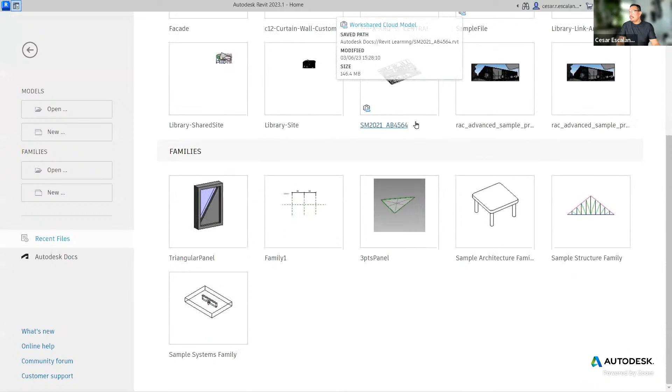Last time we talked about BIM Collaborate Pro. I entitled you with a seat to have access to our project. To recap the last class, BIM Collaborate Pro is a set of tools that allow us to share our models on the cloud, and centralize and distribute information about the projects in a common data environment that can be accessed with different levels of permissions by members from different teams. And in order to be part of BIM Collaborate Pro, you need to secure a seat of a license, and you need to be invited to a tenant site. A tenant site is a project site.

I discussed a lot how Docs works, and last time I showed you ways in which you can use Docs to send information, review information, markups. I did a lot of review of the features in Docs, but I want to focus now on the method of starting a collaboration in the cloud from Revit.

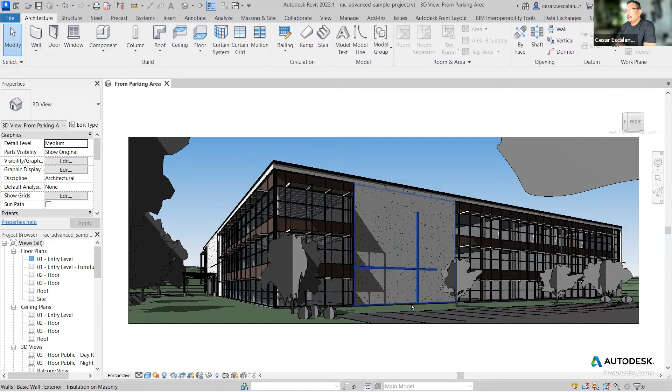All right, so assuming that this is a project that's living on your network, and then you're asked to start collaborating on the cloud, what that means is that this model needs to be moved from the local server location where it's living now into a cloud repository. This project has several sheets, some schedules, but now it has reached a point where I need shared collaboration by an entire team. Typically, in the context of a single-location office, you would save this as a central file and place the central file on the server, and then everybody connects to the server, right?

In the context of a cloud collaboration, you can have multiple team members sitting geographically dispersed in different locations around the world. And as long as they have access to a Revit license and they are entitled within Collaborate Pro, they can collaborate jointly in a single model in a single project.

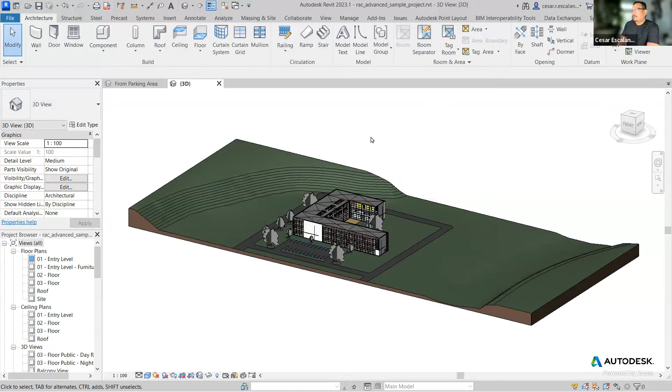So I'm going to show you how to create a new central file in the cloud. So you go to the Collaborate tab, and then you hit the Collaborate button. You must save the file, and I'm going to save it in a different location, so I don't want to override the version I have here. So I'm going to save it in my desktop for now.

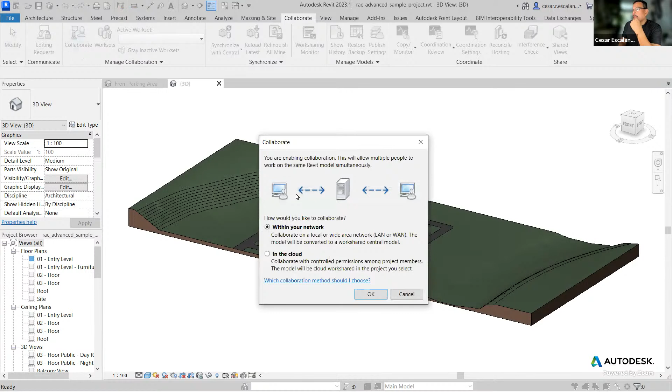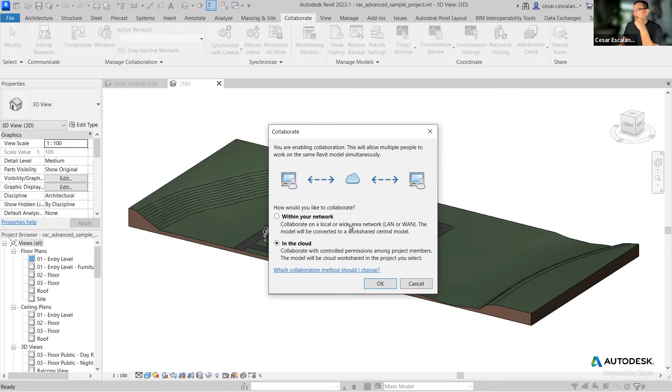So you hit Collaborate, and Revit presents you with two choices: collaborate in your server or collaborate in the cloud. I'm going to say collaborate in the cloud. Now, for this to work, the person who's doing this most likely needs to be a project administrator of the tenant site, and needs to have the permission to access the appropriate folder. I am an administrator, so I'll be able to do that.

And then there's this dialog box that is called Save as Cloud Model. So here I am presented with all the projects that I'm part of. And I'm going to switch accounts because I think I built this under the TMMArch. And the project was Revit Learning. This is the project everybody has access to. And under the models, architecture, this is the location I'm going to create this file, rac advanced sample project.

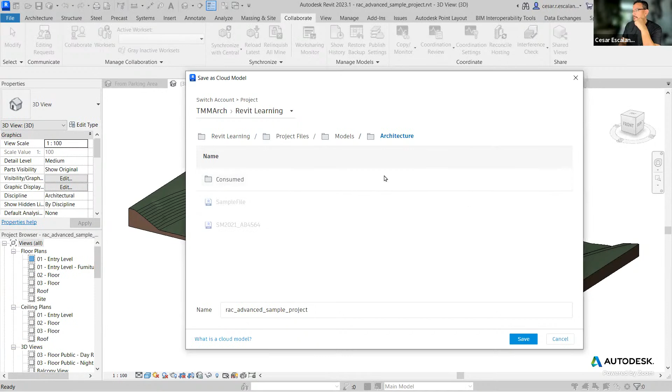Usually, the folder structure is set up so that you don't see the work in progress of your consultants. So architects are restricted to access the architectural folders and structural to their structural folder, etc. I'm going to save this into the cloud, which starts the worksharing process. In this process, two worksets are created by default: Workset1, and then Shared Levels and Grids.

Every level and grid in the project is going to be placed in this bucket of information called Shared Levels and Grids. And then the rest of the geometry is going to be placed in this generic workset called Workset1. And you know the concept of a workset. A lot of you have already experienced it, but just to recap, a workset is a method by which we split the model, segregate the model in large pieces of geometry content so that we can selectively turn on and off areas of the model that are not part of our scope of work and improve the performance of the model.

Worksets are not intended to be used as layers; Revit already has categories for that. But the main purpose of worksets is to split the model in buckets of information that can be selectively disabled to improve the performance of the project. That's the whole purpose. If the project is small and the team is small, sometimes it doesn't make sense to split a project in multiple worksets. If the project is complex and it has a lot of links and a lot of different consultants, then it's probably good to think about how to better split a project.

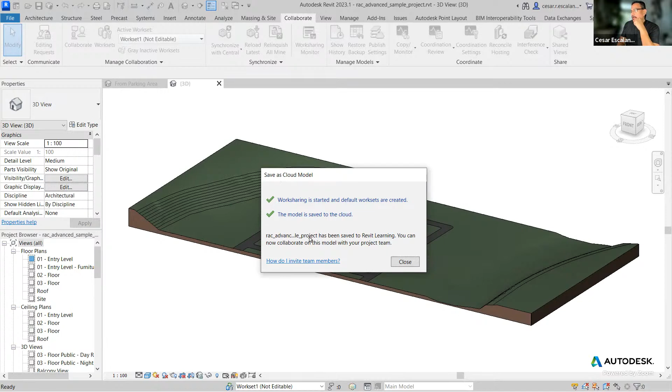An example is you can have a project split by levels if it's a multi-story, or you may want to split it by scope of work, like shell and core is one workset, interiors is another workset, site is another workset, and definitely for every link file you should have a dedicated workset. Okay, so the project has been saved. Then I close it.

Let's review the worksets. When you open the Worksets dialog box, these are the full worksets. And it has this tabular display of information. I think the first column on the right side enables the visibility of that workset in all the views. The column that says yes, yes, means that it's open, it's loaded in the project.

And then you have ones called borrowers and owners. A borrower is a person who has checked out and is working on an active element. And then an owner has complete control over worksets. All of these we reviewed in the fundamentals, and I think a lot of you know this. What you might not know is that there are also all these additional worksets, like families. Each family, all the system families in the project, are their own worksets.

You also have views as a workset. So each view in the project is its own workset. And so sometimes when a person is working in a view, the Revit central file gives you borrowing access to that view. And that's why sometimes when you try to synchronize with central, it says this person has checked out a view. That's because that person is working in the view, and that person needs to sync to central in order for you to sync to central.

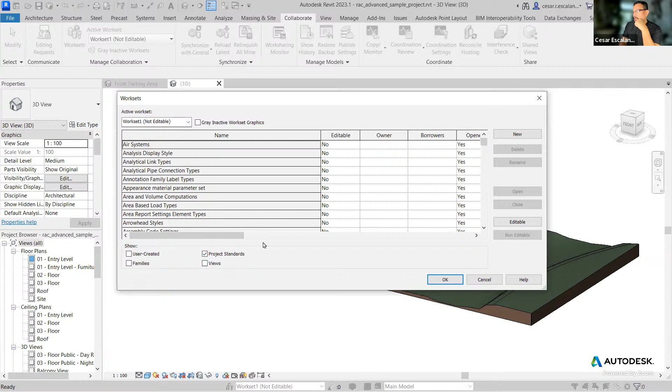And then there's another set of worksets called project standards, which are settings that you can also selectively display or control. All these peripheral or secondary worksets are not highly used. The ones we are most familiar with are the user created.

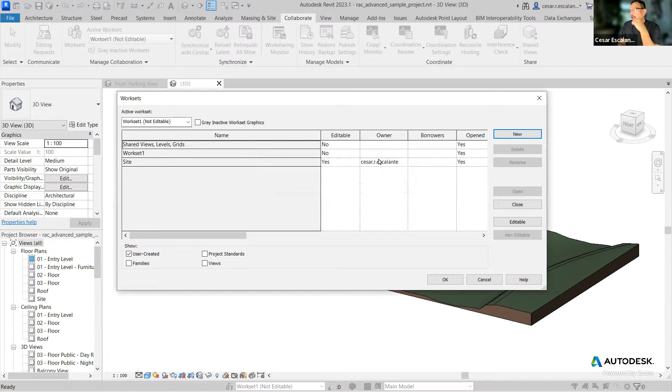All right, just for fun, I'm going to create another workset called site. And notice, because I created this workset, I am the owner of that workset. And when I'm the owner, no one else can work on this workset. Then I hit OK here. They ask you if you want the site to be the active workset. I'm going to say no.

And then every element in the project now has a workset property. So once a project is created as a central file, there's a new parameter associated with every element. Oops. Yeah, so in the instance property, you'll see that there'll be a workset parameter associated with every element. If the project is not workshared, this property is not available. And the other thing you will see is a drop-down list of all the worksets in the project that activates as well. So we need to be aware of what workset we place things on.

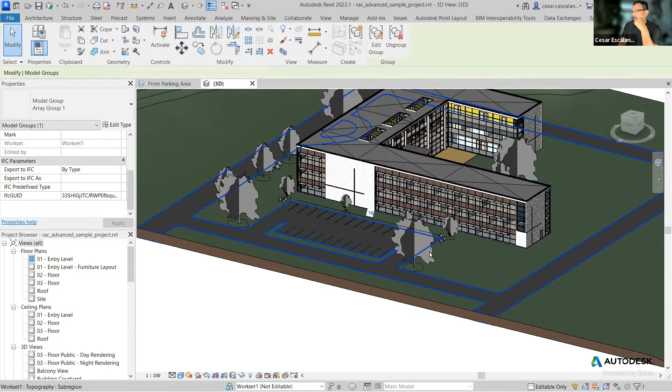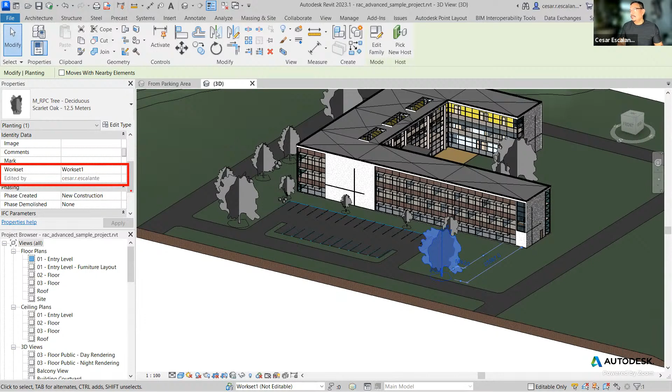And then if I start working on something, for example, I grab this element, this tree, and I move it from one point to another point. When I touch anything in the project, I become a borrower. And a borrower is the person who's editing that object. And so in the workset dialog box, you will see that I am a borrower of workset 1 because I touched that tree that is placed on workset 1, and I am an owner of that element.

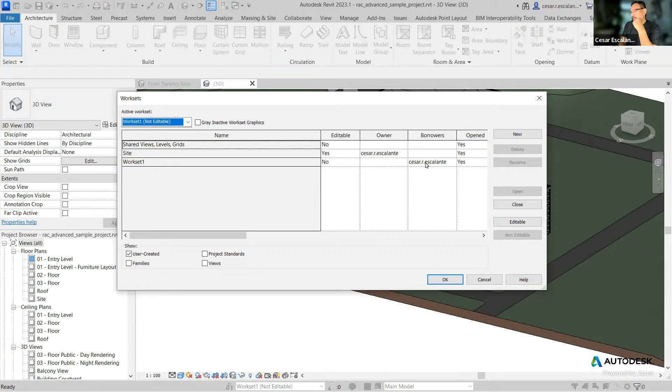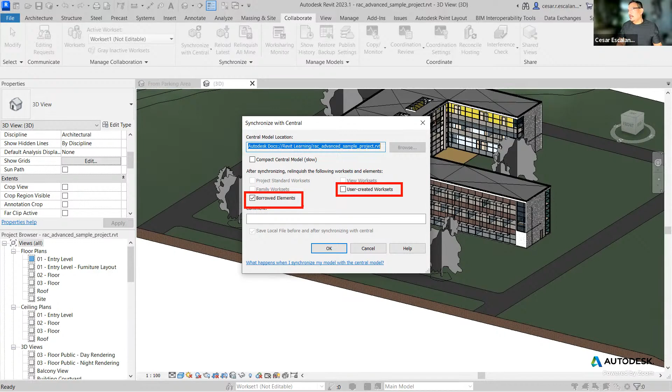If I want to save this file and share it with the rest of the team, I synchronize with Central. And notice that synchronize with Central has this option called relinquish user created worksets, and another one called relinquish borrowed elements. So if my name is associated as a borrower or an owner of any element, I can choose to relinquish or not. By default it's enabled. You can add a comment.

I mean, this is a version with moved tree. And this comment is useful because every time you sync with Central, there is a log of synchronize operations that you can selectively retrieve if anything happens to the project. And this comment is one of the parameters visible when you try to restore an old project.

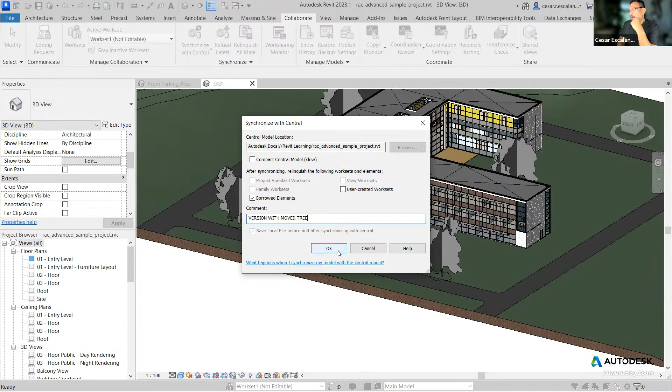So I hit OK here, and when you sync to the cloud, there are 4 things that happen. You save to local, you reload the latest, then you save to central, and then you reload again. Depending on the size of the model, this could take a few minutes for a very large project.

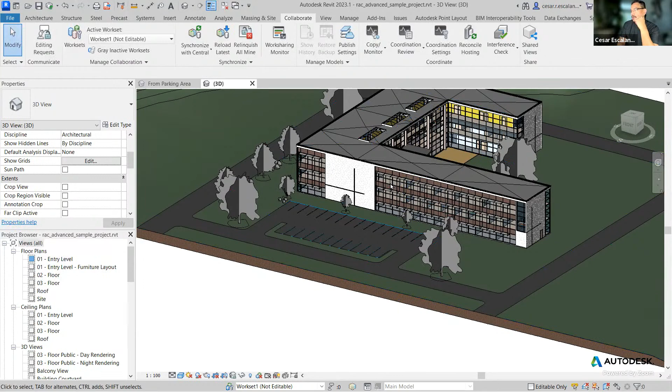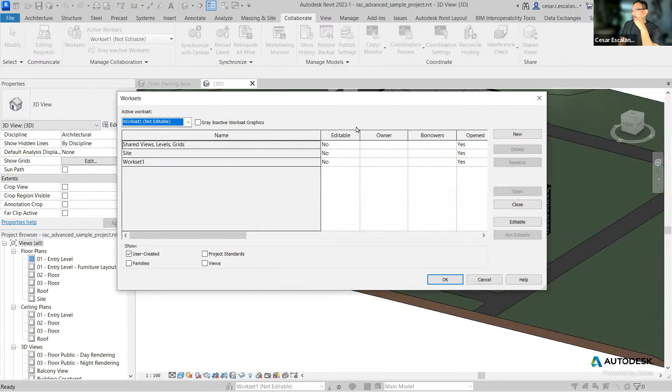All right, and if I go back and review my worksets, notice that I'm no longer a borrower of an object, but I'm still the owner of the site workset. And the only way to return the site to others is to use relinquish all mine. So when I relinquish all mine, my name disappears from the owner column, and this project is open for others to start collaborating.

All right, so let me show you what happens on the cloud side. So I created this file and I shared it on the project. And in Revit, under models, architecture, here's the file. And notice that there's a version. Every file that is synced and created in the cloud will start with version 2.

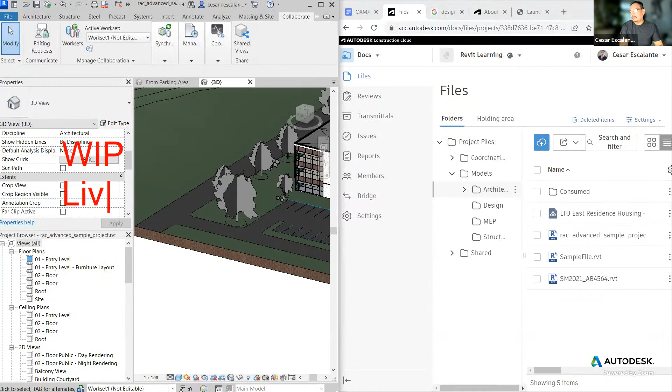And so moving forward, if I make a change to this model and I synchronize with Central, that is going to share your changes to the cloud. But I think I told you that in Revit, there are two buckets of information. The work in progress, which is the live model. And then we have the static bucket, which is what you see in BIM Collaborate Pro, in the docs. And this is a published model.

And so when we create a central file, Revit automatically publishes version 1 and version 2 of the model in the cloud. And then moving forward, if you want to share a static published model in the cloud, you have to choose when to do that. It's a declared activity.

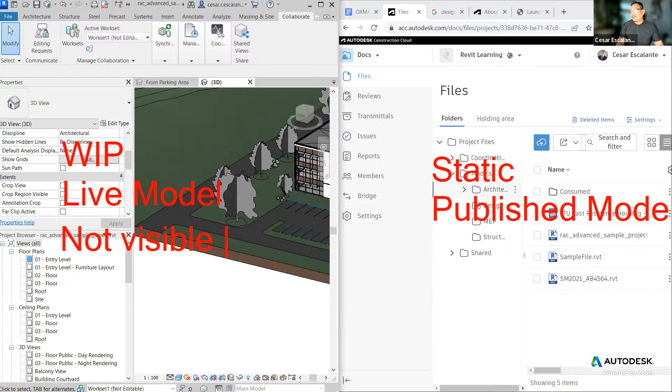So the work in progress live model is not visible to you. This is not visible. And then the static one, it's visible. It's what's in there. Does that make sense? All right. So this is the published file that I generated by creating the central file. And then you get a description of who created it, when it was created.

But there's this misconception that every time you sync to Central, the file that you see in Docs will get a new version, and that's not true. So the act of publishing a file is an operation that requires a user to decide when it is okay to share a file and what content the file needs to have, right? So sharing is not just sending everything to the cloud. You need to make decisions about when and what you're going to share.

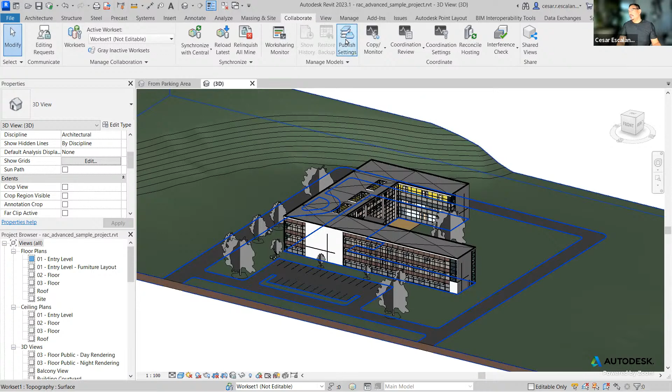And to decide what you're going to share, you actually need to set up publish settings. So under the Collaborate tab, publish settings, this is where you create sets of drawings. A set is a collection of views and sheets that are part of a deliverable. And you can create as many sets as you want with a combination of different views. If a set is enabled in Revit prior to the sharing activity, then only the elements that are part of that set will travel with the file.

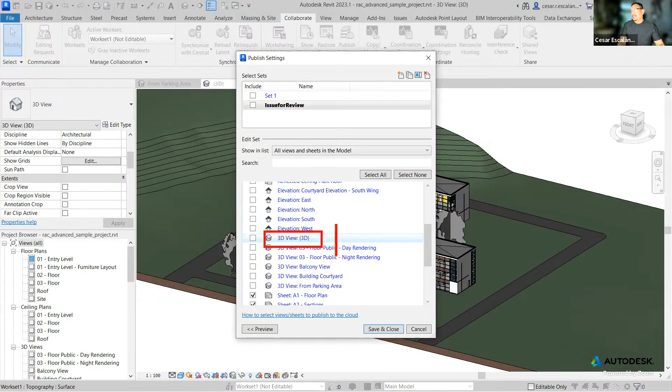So I'm going to create a new set here. And let's say that this is a set that is issued for review. And this set is made of the sheets in the project. So I'm going to select the 2 sheets here. And by default, Revit is always going to include the default {3D} view in brackets. Whether you pick it or not, Revit is always going to pick that default {3D} unless you tell it otherwise.

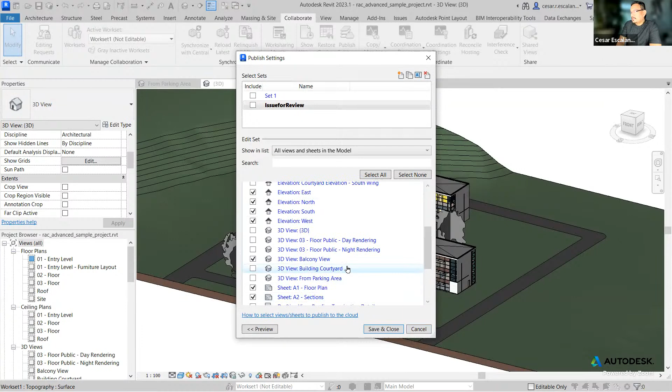So I'm going to pick some of these elevations as part of the set, and I'm also going to pick one 3D view, the balcony view. So in total, when I share this to BIM Collaborate Pro on Docs, I'm going to have a total of 8 views, including the {3D}. So I'm going to save this. Okay, I need to enable this and then save it. So all these checkboxes will be part of the issue for review.

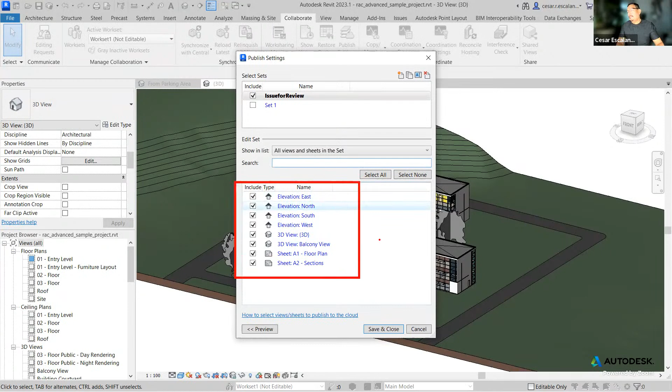And then I am deciding here what to share with the consultants. And every time you publish, you have to make that conscious decision. What is it that I need to share on the cloud? You don't need to share everything about the model. You can be selective about what things are important for your consultants to see. And this subset of information in Revit is called a package. So a package is a collection of views and sheets that are prepared by a consultant and that are suitable for consumption by other users.

And so you create your set, and that's it. I'm going to again synchronize with Central so that set is remembered and shared to other users. But I haven't published this file yet. So let me show you how publish works. To publish a model, you have to go back into the Revit welcome screen. So from the welcome screen, you navigate to where the model is.

This is the model. And notice that the model reports that there is an update available. It means that from the last time the model was published, which was here at 5:49 p.m., there are new changes created by this person, and the user has the ability to publish this as a new version. And so what the user does is select the file and publish.

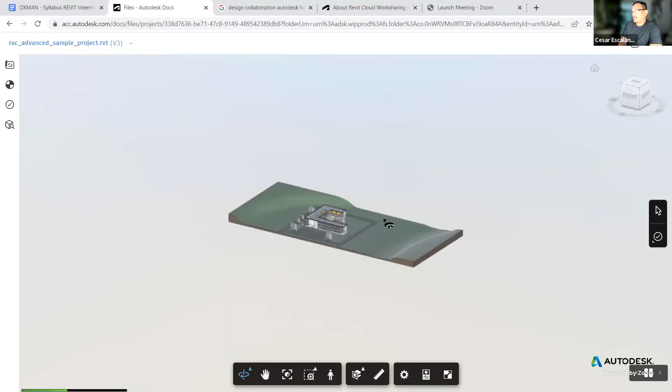This little circle is it compressing the geometry of the view so that it can be quickly, easily navigable in the viewer. Now it's finished. When it's finished, it's actually viewable. And this is version 3, and this displays the model with the tree that I moved, and with the worksets that I published. And so you have to make changes in the model, and you have to manually publish it with a subset of sheets in order to see a new version.

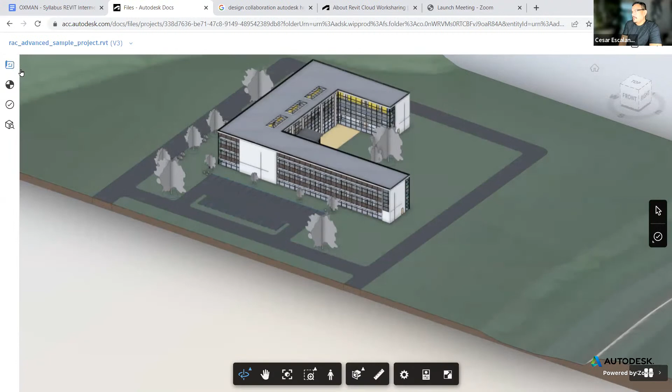Now, in the viewer, you have access to the sheets and views. So here where it says sheets and views, this is the default 3D that I picked from Revit. And in the 2D are the 2 sheets, the elevations. And so the sheets and views tab is a reflection of the information that you placed in the publish settings. So all the information that you see here is the information that you see in the cloud, right here, and is associated with a version in the project.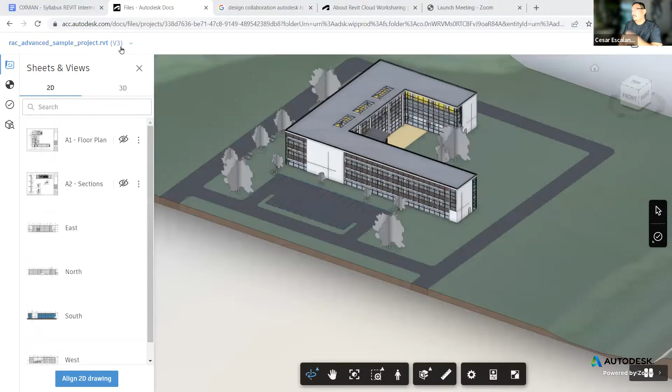Now I can also access those sheets directly from the visualizer. I can use the markup tools that I showed you how to use. You can even print directly from the cloud if needed, or you can share with other stakeholders that are part of the team, or download it.

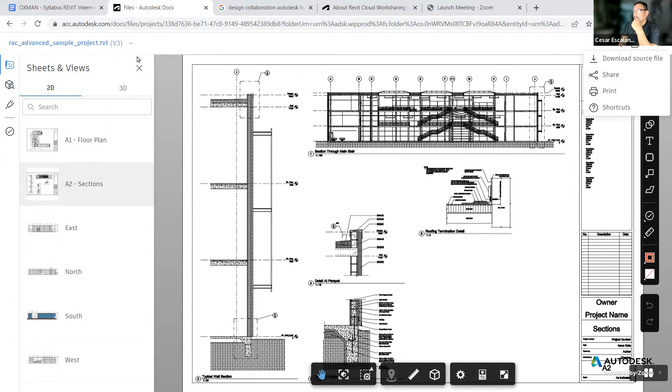All right, but this is the process of publishing a file into your own discipline in the cloud, right? So this file is not yet accessible to your consultants. This is just available to you because it's placed in a dedicated folder called architecture, and only the architecture team has access to this folder.

And so the Design Collaboration module allows you to create packages of information and share them with consultants. The consultants have the ability to review the content and then consume it. And so that's what I'm going to explain next. So before I get there, any questions here about how to create a central file hosted in the project and publishing a version of a model? All good?

I have a question. If you accidentally publish something that you don't want to, can you retract it? If you publish a version of documents that you did not want to share, you can always republish on top of it. But what you should not do is delete this, because if you delete this file here, and I should write that down, that's a big warning: don't delete the central file.

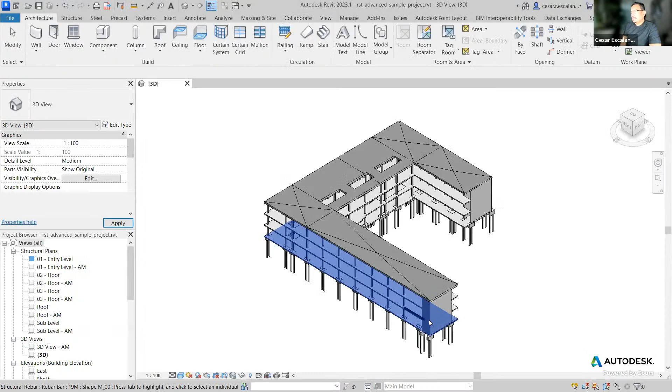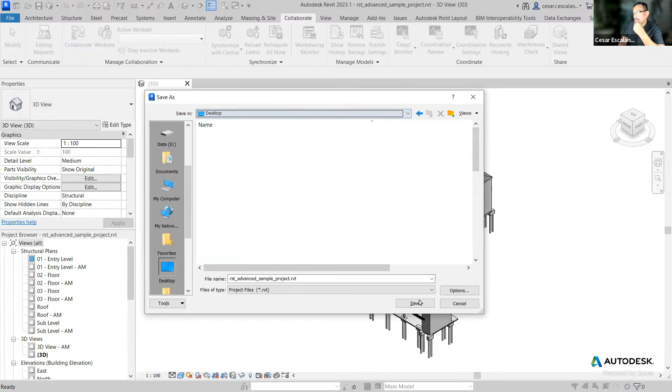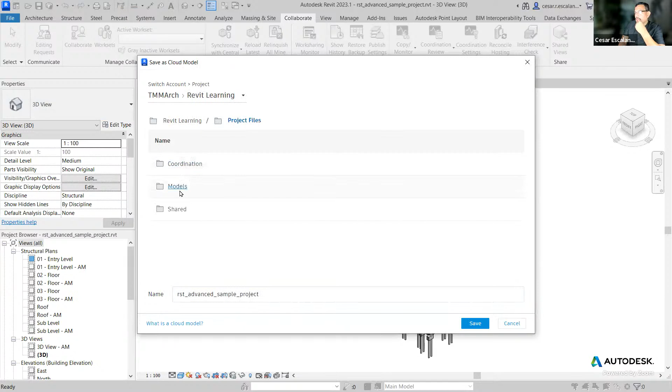I'm going to go fast here. Collaborate, assuming that I am the structural engineer. It's going to ask me to save this file in an alternate location. You cannot do it in this read-only folder, so I'm going to put it also on my desktop. I'm going to collaborate and save this in the cloud. As a structural engineer, I have a dedicated folder in the project. Here is the project folder on the models, structure, and then I save it.

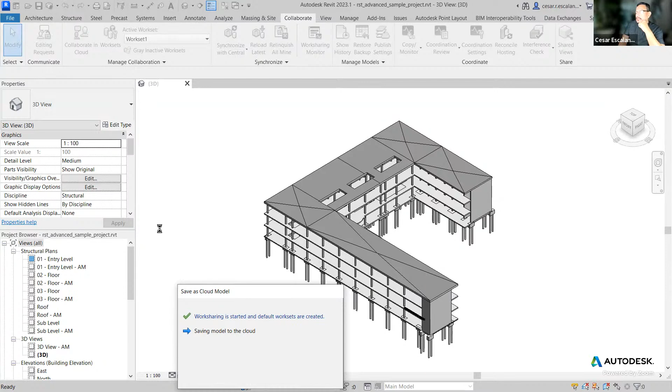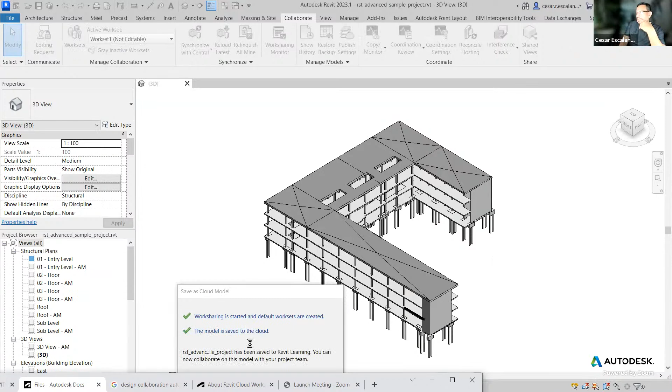It's going to be sort of fast. It's Revit creating the worksets. It subdivides the geometry in these 2 buckets. Then I'll synchronize with central. A new model is created under Docs, models, the structure. I guess it's finishing. Yeah, it's finishing. And so in this example, I'm going to show you 2. Here it is. The project has been saved. And here is where it appears.

I'm going to close it here. I'm going to synchronize with central. This is going to relinquish. This is where the version 2 is created. That's when you sync the first time and relinquish all your information and close it. But before I leave, the structural engineer is also going to create a set that is going to be called issue for review. And the structural consultant picks the sheets he wants to share with the rest of the team. I'm just going to pick 3, so it does this fast, and the 3D in brackets. 4 views. Save and close. Synchronize with central.

When I look at the cloud, notice that version 2 is created as soon as you sync the central file and close it. And then the structural engineer closes this file. And when I go to the structural folder, notice that it's telling me that there's a new update. The update is that I made the changes in the list. I added the publish settings and I created a new set. So it's telling me that you can create a new shared document. And as a structural engineer, I publish this to the cloud, and that's going to create version 3 when this is finished processing.

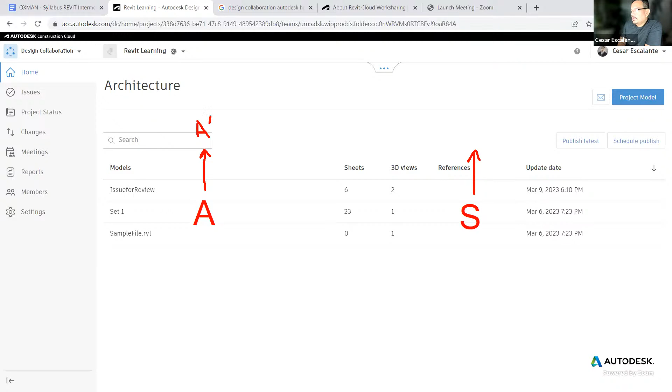And so design collaboration under the home tab has... I want to explain it first, what is the logic behind it, and then I'll go into the mechanics. So you have an architectural model, and then you have a structural model. Each of these disciplines publishes a static version, right? So this is, let's call it, the architectural model version 1, and this is the structural version 1.

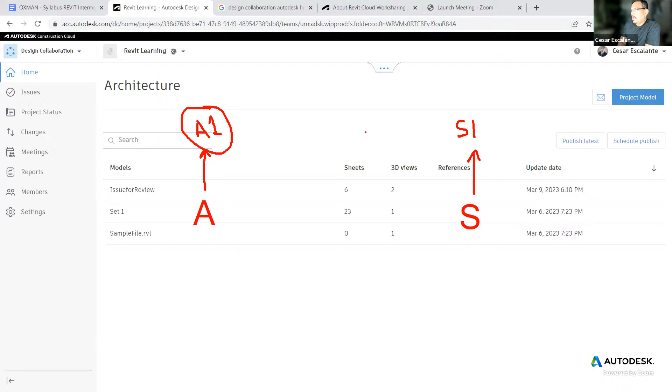Then the architects decide to create a package. A package is a collection of documents from this file, and it's going to put it in a place where structural can review it. So let's say that there's this shared folder where the architect selects the sheets that he wants to share with the structural, and then places it into this bucket. And the structural does the same. The structural publishes, creates a package, and then places a version of this package in this placeholder space, and that is a shared folder.

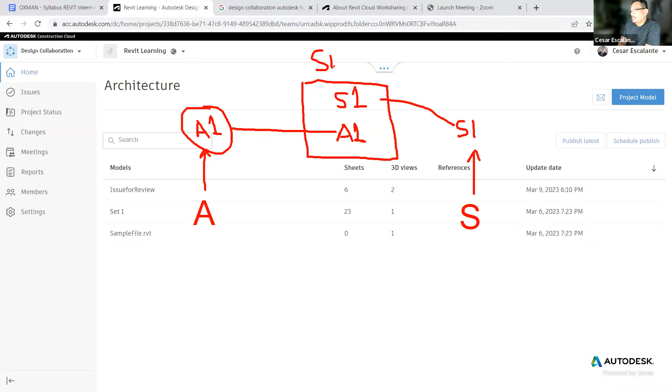And so now the disciplines read each other's information: the architect can read the structural information, and the structural can also read the architect's information. And then they can decide, is this information suitable for my use? Because sometimes the structural may be missing stuff, or it's going to impact the graphics of the architect. And so the shared space is a dedicated space where everybody places the models and everybody reviews each other's models. And when the discipline decides that the counterparts are suitable for their use, they consume it.

So they bring this version of the structural and link it into their model. And so this is a consumed model. And the structural does the same. They explore the content of the architect, and if they like it, then they consume the package, and then they link it. And so it's a process where you stage a lot of information, you review it. If it's acceptable, you consume it, and then the links in the cloud are in this consume folder instead of a live link.

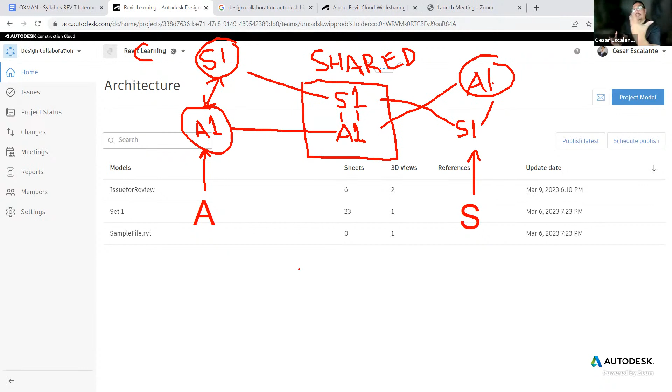This method of working is in line with the ISO standards. I think the ISO 19650, which says that in order to keep the quality control, teams need to be able to decide whether the information provided by the counterparts is suitable, and then they decide to consume it or not. Does that make sense?

And so when we work in design collaboration, let me switch back to home here. No, here, the files. Docs. All right, so looking at this folder structure, this is your work in progress. This is the dedicated folder where you have your files. Then when you create a package, Revit automatically moves it into this folder under the folder Shared. So this is the review space. And this shared folder is accessible and viewable by everyone.

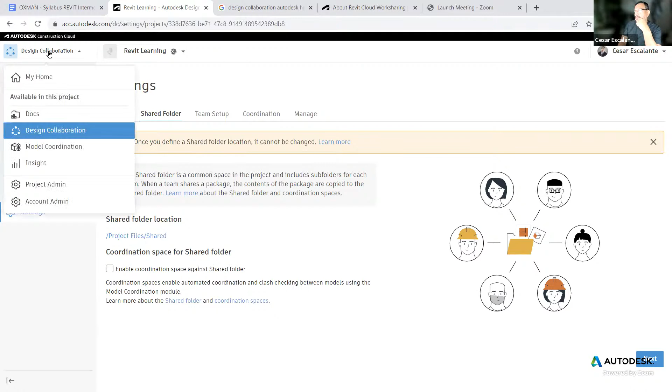All right. So I'll go back to the home page. And here you go. So I am an architect that has published from Revit. These are the swim lanes, and the swim lanes represent a timeline of all the versions of your model that you have published in your dedicated folder. So as an architect, there are two versions of published models. Version, and these are other models. This is not. Let me see. Where are my packages?

Okay, here is Rack Advanced Sample Project version 3. Ignore these other two because these were the other ones that I created. This is the model that I published from Revit into their space. And so the swim lane represents a list of all the packages that each discipline has put in their work in progress file.

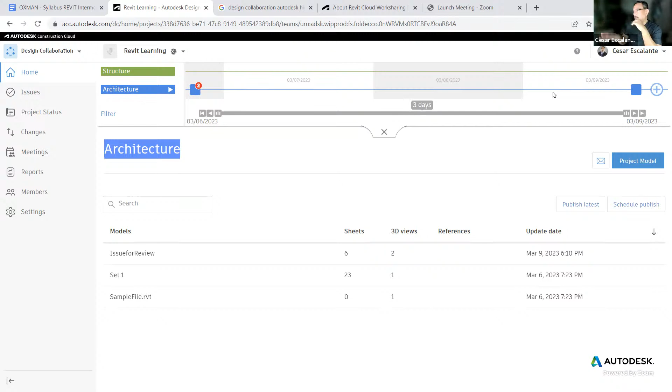So in other words, when I switch to Docs, every time I publish a model from Revit into my folder, this rack sample, every time there's a new version of this project, then graphically, Design Collaboration is going to display a little square, which represents a new published model. This square represents a published model.

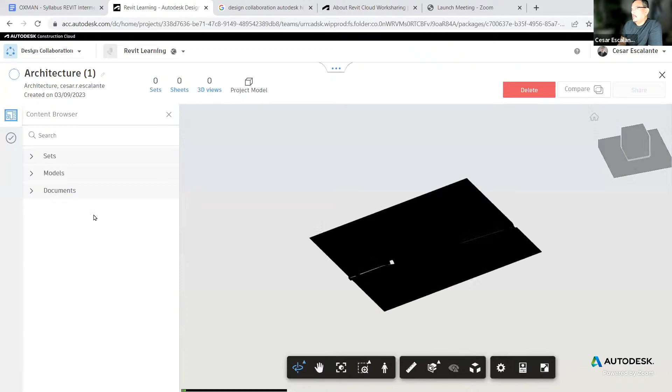And then I say, okay, this is a model that I have put in my folder. I'm ready to create a package for the consultants' use. So this plus sign, create a package. And a package will display the sets, the models, and the documents that I want to share with consultants. And so in this, see, right now I haven't selected anything.

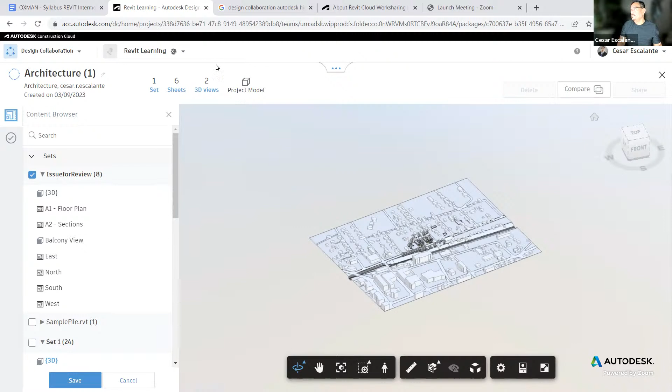And so as an architect, I said, I want to share the Revit model, and I want to share the A sheets, or the issue for review set that I publish with the model. And so a package is a collection of sets, sheets, and 3D views. So there's a total of 9 elements in the package I'm going to create.

I save this, and I can call this the architecture review set. And I can save it. And I say, okay, this is the content of the set I want to share with my team. And then you share it. So when I click share, the tool will make a copy of this information and place it in the share folder that I was telling you about earlier. And this does it automatically. You don't have to do that manually.

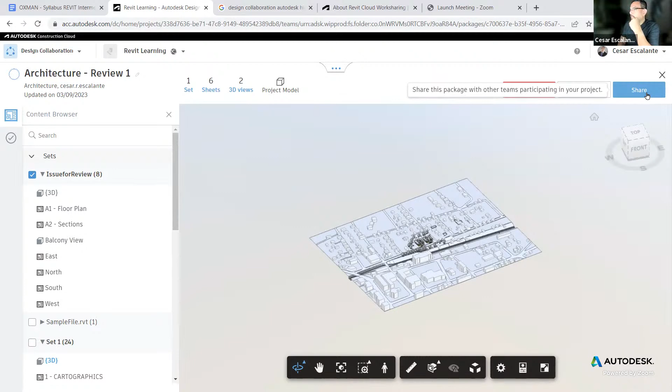When I click share here, it gives a name to the package. I share it. It starts packing all this information and places a copy of this file under the share folder. So I'm going to be shifting between Design Collaboration and Docs. So in Docs, I have

under the share folder, under the architecture, notice that there's this file here that I didn't create. I didn't put it here. Well, I did it through Design Collaboration, but I didn't actually drag it and drop it. The tool did it for me. And notice that it has a separate line of versioning. And so this is the file I put forward for the consultants to check.

All right, let me show you how the consultants use it. So I'm going to go back to Design Collaboration and open that tab here, the swim lane. And so this square represents the file that I published from Revit. And this little circle represents the subset of information I created from this published file that is suitable for consumption. So the square is information in my folder. The circle is information I placed in the share folder, right?

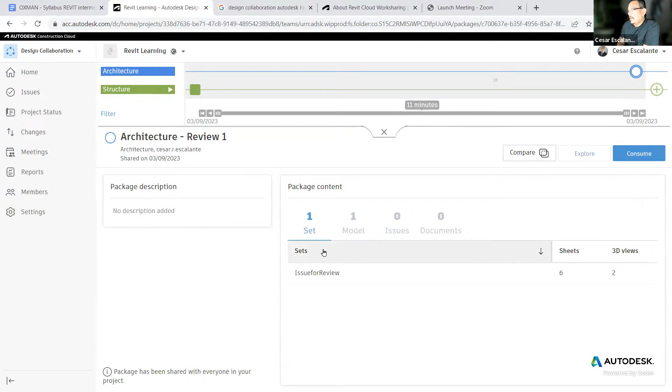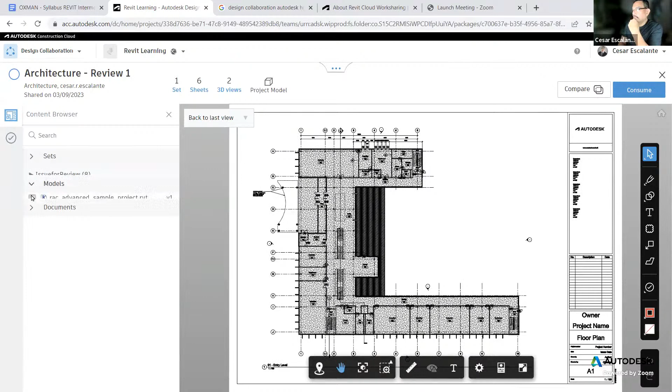So you click this button from the architects, and it says, on this date, there's an architecture for review. It has 6 sheets. It has 2 views. You can preview it. You can actually see what it is that the architect has shared with you. You can explore the subset of sheets. These are the sheets that the architect has shared with you in the share folder. And this is the model with a 3D view.

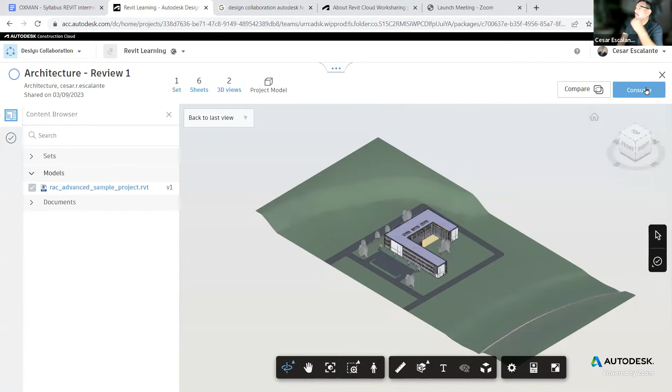And if after the structural engineer reviews all this information and deems that it's okay, then he consumes it. And when you consume it, BIM Collaborate is going to grab a copy of that share file and put it in the consume folder of your discipline. So I'm going to consume it here. I'm a structural engineer. I'm going to consume the architect's file. Consume it.

And let's see what happens in Docs. So again, I am a structural engineer, right? And I only have access to my structural engineer folder. So you go to the structural folder, and there's a consume folder here that was created by the tool. And when I open it, there's an architectural folder and the package or the packet that the architect shared with

me. And so this file is the source of information where I link the architectural file inside the structural file. And so these are the mechanics that happen when we utilize BIM Collaborate Pro. There's this process of staging information for somebody to review it, and consume it. And the process of sharing and consuming is done by the tool. You don't have to do that yourself.

And so as a structural engineer, let me go back to the structural model. This is the RST model. And I say, okay, I have reviewed the information of the architects. That package that is shared with me is suitable for my use. I'm going to link it. So Insert, Manage Links. And then from the Manage Links dialog box, I'm going to add the architect model.

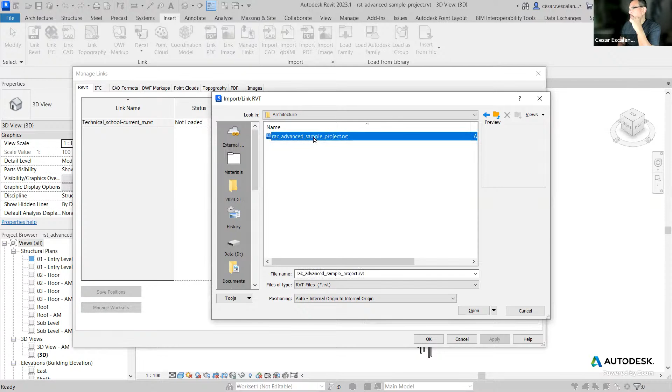And you notice that it automatically goes to these external files. External files is a way to navigate through the model. So go to projects, models. You don't go to the architectural file. You go to your own discipline, structural folder, consume folder, architecture. And this is the copy that you reviewed from the architects that you approved to be used in your project. And then you link it directly from here. And then it should appear now, and you can continue working on it.

Can I ask something? Mm-hmm. Every time you consume a model, in the consumed folder, do we have an overwritten file of the previous version, or do we have to relink to different models? How many models do we have in our consumed folder every time we consume? You will have, yeah. Okay.

So this is version 1 of the consumed model from the architects. Next time the architects share a new thing, as a structural engineer, you consume it, it's going to replace this file and it's going to make it version 2 in the consume folder. You don't have to relink anymore. The link is going to refresh automatically. You just have to link it the first time.

And then from here moving forward, every time there is a new shared package and the discipline consumes it, the link will be refreshed automatically. So this two-step process is only in the beginning. When you first consume the model, then you need to link it. Okay, got it.

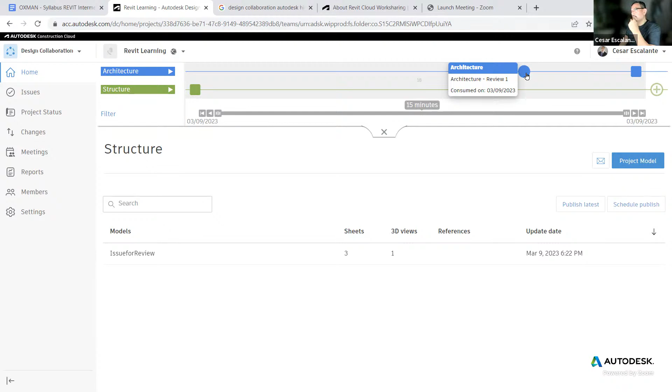Another question, just to understand the whole process. As architects, we first publish and then we make the packages, or we don't have to make the packages? It's not something necessary? No, you have to. Okay. Your discipline cannot create packages for you. I'm able to do that because I'm a project administrator, and I can have access to those folders

at a time. But in the sequence of events, you make changes in the model, you publish them into your folder, which creates this rectangle. Then you create a new package and leave it there. Then your consultants need to activate their swim lane, review the package that the architect created for them, and then consume it. And every consultant does the same.

So to review the process, let's do the same, but the opposite. Let's say I am a structural engineer who wants to share the structural model with the architect. So the structure already published a model. It's in Docs. And this square representation is a published version of the model that hasn't been created as a package.

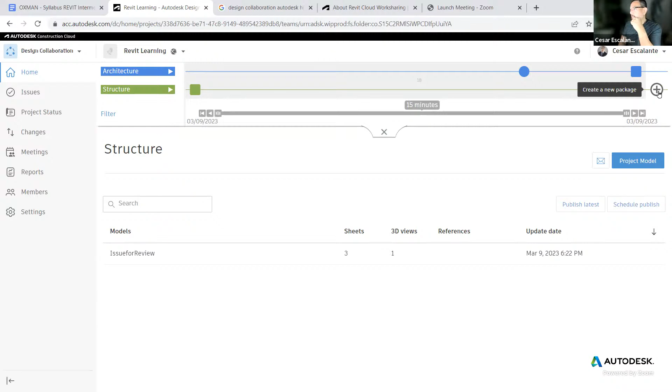So as a structural engineer, I want to share my information with the architect. So I'm going to create a package for the architect. Create a new package. Revit presents all the information you can use to build this package. I'm going to select all these issued for review, and also the 3D view. So there's 3 sheets, 1 set, 1 3D view.

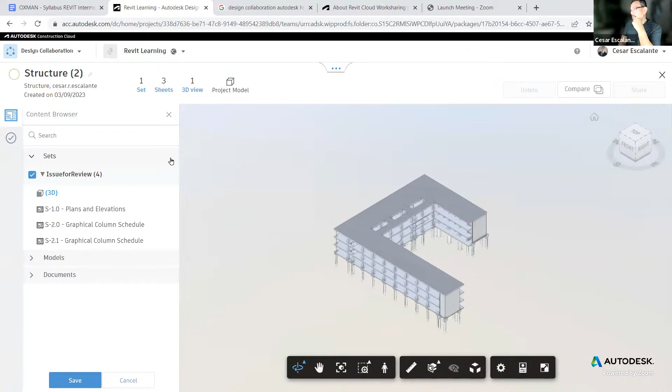This is the content that I want to share with the architect, my counterpart. I save it, and I create a package for him as soon as I share it. Sharing will make a copy of my file from my discipline folder into the shared folder. So I share it here, and that's it. My job as an engineer is done.

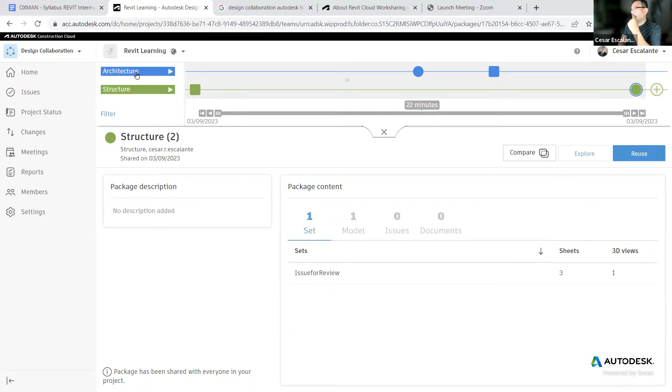Now, as an architect, I go into Design Collaboration. I activate my lane, the architecture lane, and then you see, oh, structural has a new package for me. What have they shared with me? When this little circle is empty, like a white circle, that means it's a package that hasn't been consumed. In fact, if you hover over, it says structure created this package of information and shared it on this date.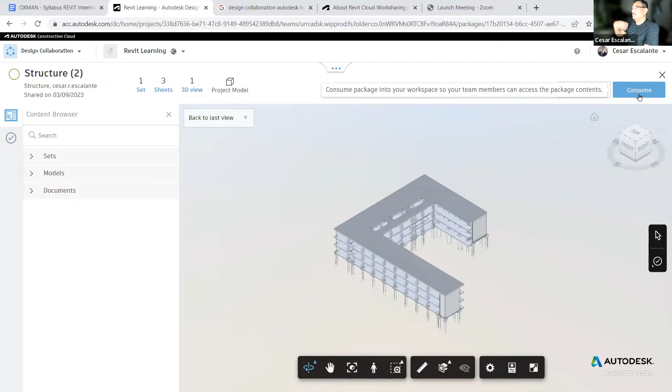So you review it. You can actually access the information, review the sets, the sheets, the model. And if this is appropriate, then you can consume it. Consuming is going to move a copy of the structural engineer's file into the consumed folder of your discipline. So I'm going to consume it, and back to my swim lane.

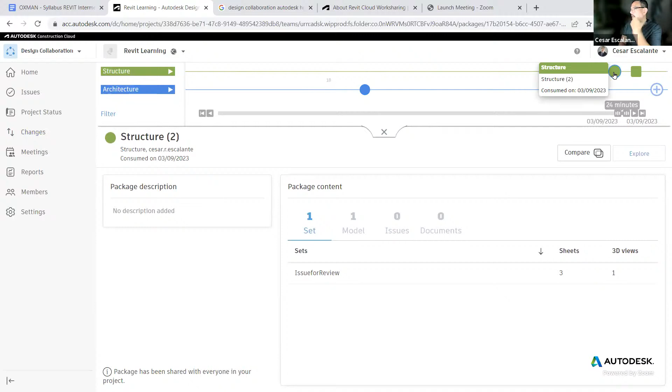Notice now that this package is now solid. That means that I consumed it on this date. I'm going to close this file, which is the structural file, and open the architectural file. So let's go back to Docs. In Docs, I open my folder, architects. There's a consumed folder that Design Collaboration created for you. There's a structural folder that Design Collaboration created for you. And this is the package that you consumed from the shared folder.

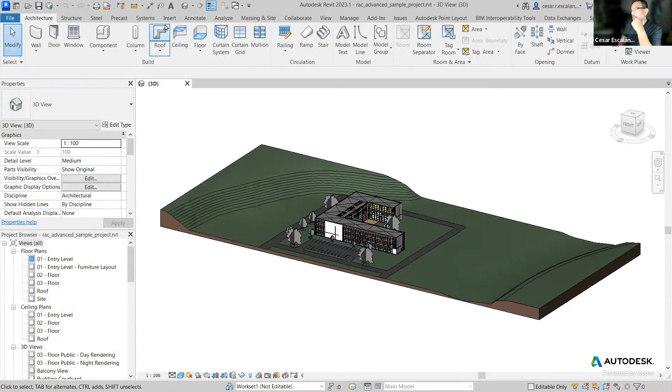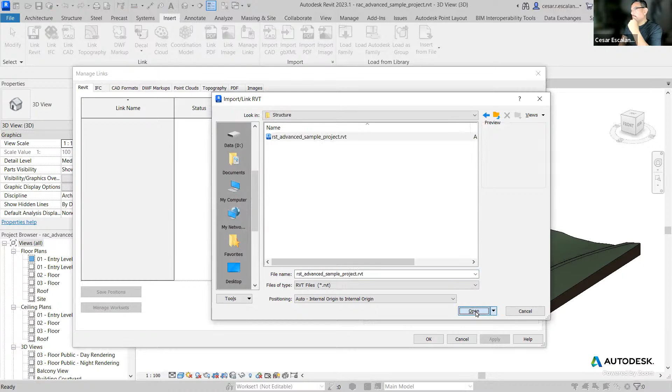And so in Revit, this is a one-time operation. In Revit, you link the structural model from the consumed folder. Next time you consume packages from structural, it's going to replace the version, and you don't have to refresh. The link will be refreshed automatically. So I'm going to link it here, Manage Links. This is a one-time operation. Then I go to my own discipline, architecture, consumed, structure. This is the structural folder that I reviewed and deemed appropriate for my use.

And then moving forward, you don't have to do anything. The link is going to refresh automatically. And that's the link over there. Any questions?

So when you publish version 1, version 2, version 3, it keeps a record, but it's not viewable. You as the architect keep version 1, version 2, version 3, but those versions are not viewable to your consultants until you share it as a package. And that's when they can consume it and link it. But they cannot access that until you share a package.

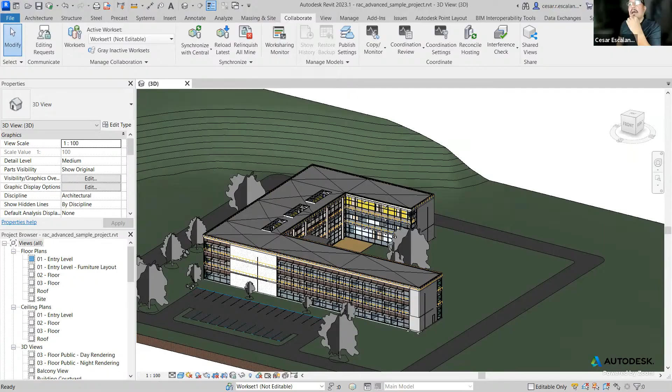Correct. So going back here, in this shared folder where everybody has access, I'm an architect and I see the structural model that they have shared. If they have continuously shared packages, I can see the different versions on top of each other here. But structural cannot access the architectural model and its different published versions, only the packages that the architect decides to share in the shared folder. So let me see if I can diagram this better.

But if it is a live link, they see updates immediately, right? Yeah, so this is the low risk and the other is the high risk. The live link is another method. In that scenario, whenever there's a published model, the architecture automatically links. But it's really high risk because it removes your ability to review your consultant's file before consumption.

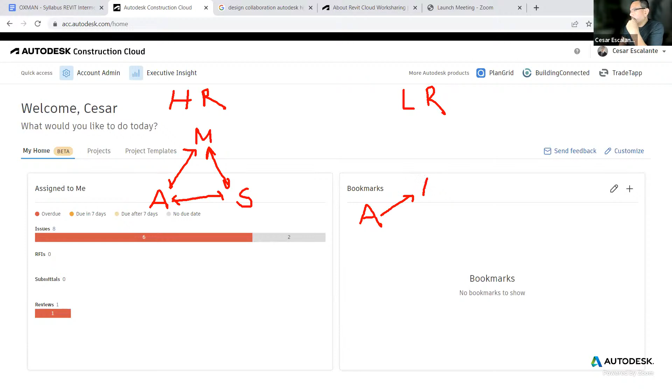And then the low risk, which is this method, has a more intermediate space. And so in this case, you have the architectural model, you publish, this is the published model. This is all cloud. You publish a set in this share space. The structural publishes a set, and mechanical publishes a set as well.

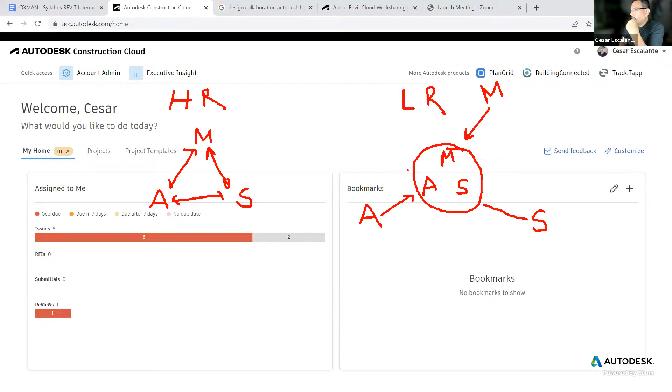And then in this space, you review it, and then you make a copy of that into your own folder, S and M, and then you link it. The structural does the same. They move the architectural and the mechanical from this space to here and to here. And then the mechanical copies the architectural and the structural, and then this space is called the consume. So work in progress, share, and this is the consume.

So there's a handover process in which there are two quality control steps. Although it seems a little convoluted, I think this is very practical and easy to do. You just cross-link the published versions. There are teams that want to put in place international standards, in particular international pieces of work. They choose to use this low risk as opposed to the high risk, because it allows them to have greater quality control over the product.

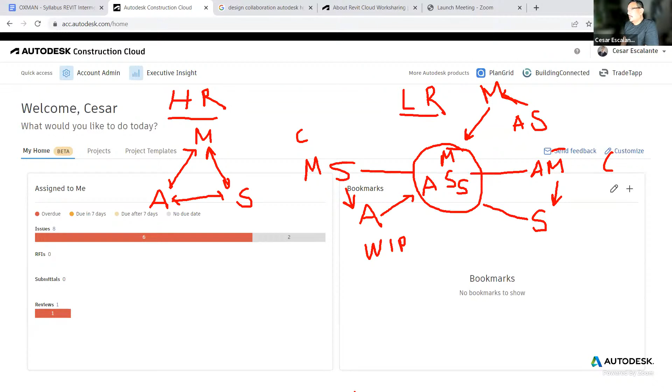Let's see my recommendations. If you have an established relationship with a trusted consultant, and you've done this over and over, you have a history of working with a consultant, then you can choose to work high risk because you have a high trust, right? But if you have a high risk and low trust, you don't have a history of working with somebody, you don't know how they may be able to deliver information for you. The share consume method is probably a better way to have greater quality control checks in the process.

Could I add a comment? Yeah. This is really valuable, even if you are trusted and experienced with the consultant team, because you may be in front of them and they don't want your published work to find its way into their documents right before a submittal. So this gives them the opportunity to kind of delay the update. You know, the drawings would be out of date if someone studied them, but they won't be all jumbled up with the architectural link in the background. So they should want to go the low risk way anyway.

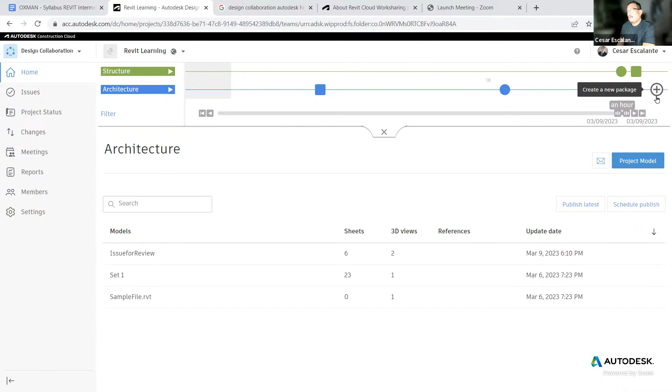And moreover, understand what these consume and share folders are inside Docs. In particular, when a new person comes and sees all these redundant copies of the files, not understanding that these are system folders created by BIM Collaborate Pro. So when you onboard somebody, let them understand what the share folder is and its purpose, what the consume folder is and its purpose, and how the tool works. You publish your file in your discipline, then a copy of that file is placed into the share by the tool, and then a copy of this is placed in the consume by the tool.

You know, you said something that really is the heart of the problem, because we may really understand how this works and really want to use it, but then you get your team together, they've never used it before. There'll be all kinds of resistance to learning the new workflow, even though it would benefit everyone.

So it just probably takes a kickoff meeting and maybe not really a training, but at least an introduction to the way the project's going to be run, and then let them go off and either look at some YouTubes or educate themselves. It's not that hard. And then once they see the benefit and they understand the beauty of it, then you're off and flying.

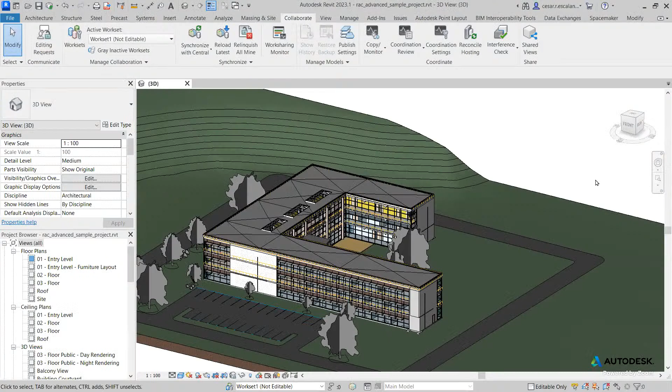All right. Cool. Curtain walls, is that relevant for you guys? Yes, we do that. Here, if we're talking outlook for next class, having panels that are adaptive panels, say you have a panel that you're putting louvers in and you want the ability to adjust the louvers, a louver panel that's hosting onto a curtain wall panel. That may be a little too convoluted, but that seems like an advanced thing. It's funny you mentioned that because I just taught my students at CCA how to do that. Cool. We're getting a preview. Yeah, I'll just show it, so that's the kind of exercise you will do.

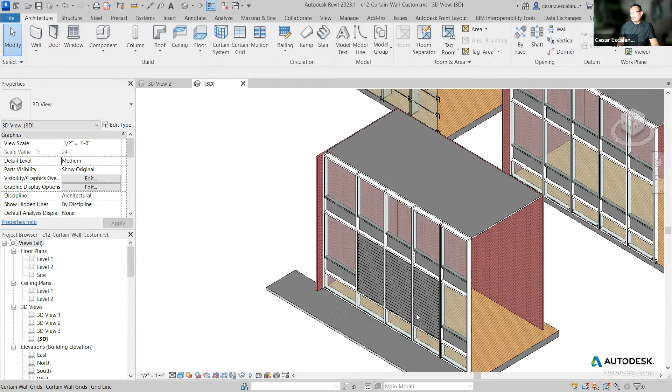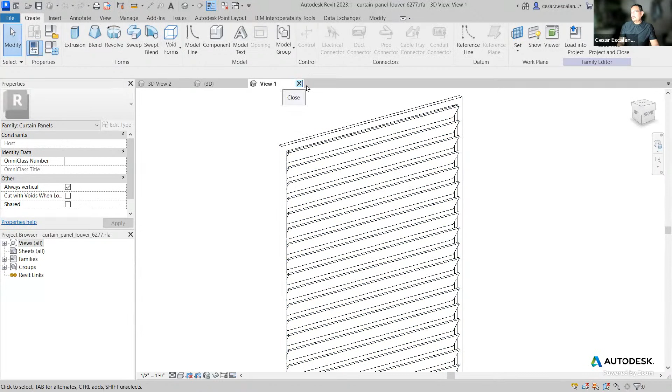These are custom curtain panels that are parametric. When you edit this curtain panel, it's basically an array. And you define how many units, the size of the fin, and all those can be controlled individually by the curtain wall panel. So I'll do something like that. Very cool.